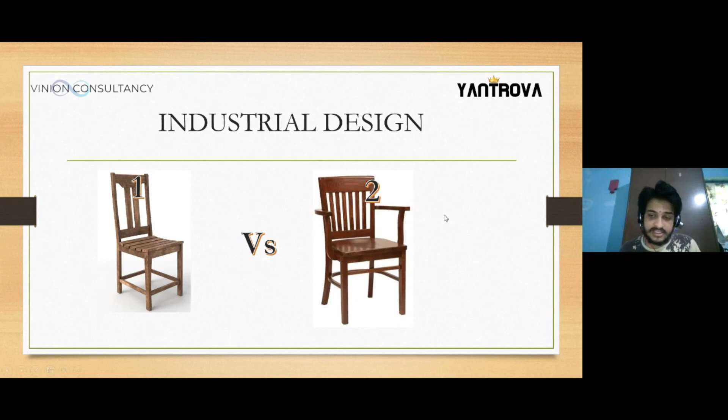Let's come to this chair part. When we compare the first one and the second one, in the first one we don't have facilities in terms of handrest, and design-wise, look-wise, it is not so good. So all these are important when we are designing. Since this normal first chair does not have those things, and when we come to the second and third chair, the second chair has a handrest and all those things, but the third doesn't have it, but the stylish look and comfortability will make the preference.

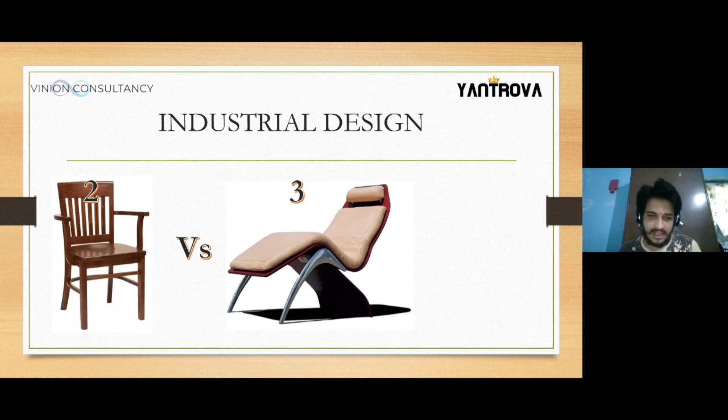Again, the preferences may change, the preference can be the second one or the third one. So again, we will go to the next one. When we see this design, kindly tell me which phone design you prefer, the first one or the second one?

First one or the second one? It's not the third one. Are we talking about the first one or the second one? The second one.

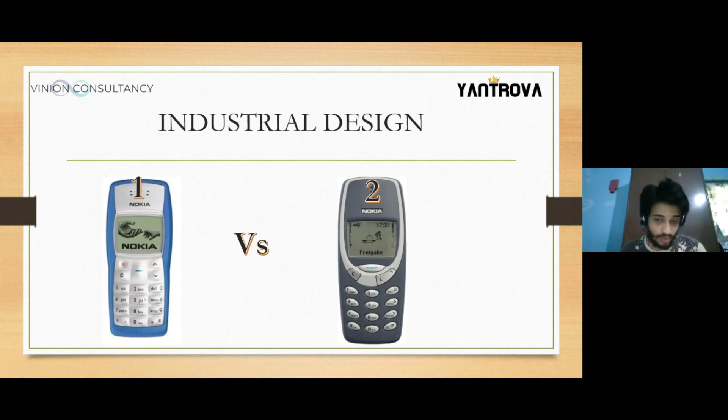So we all prefer the appearance one. We did not check the technology or anything. We prefer the second one because of the design, the appealing design. So even though it was old, the appealing design was good, so we prefer the second one.

So the major task, most major task, is to make the model or your product appearance-wise good. Even though it is functioning very well, more than the functioning, the appearance plays an important role.

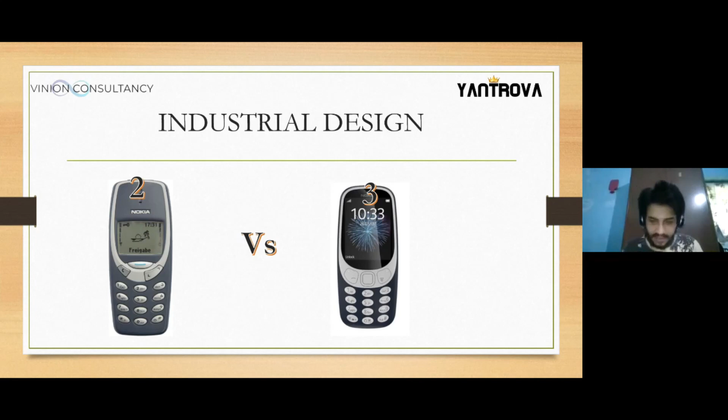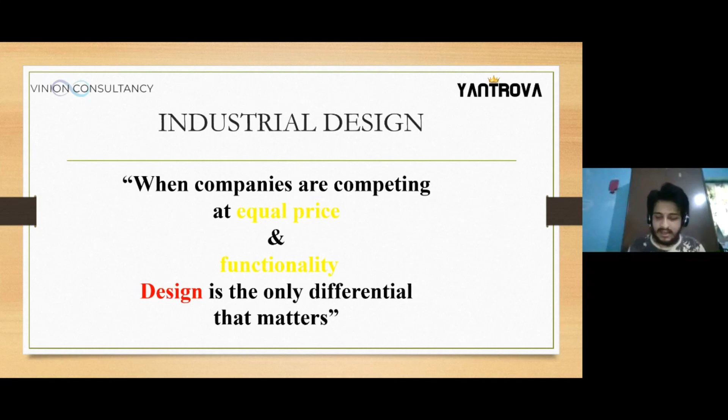So now we'll be defining industrial design. When companies are competing at equal price and functionality, design is the only differential that matters. So when there are equal price and equal functionality, for example, if you are planning to buy a phone and comparing between two phones with the same specifications and almost matching price, then you go for the design part, the looks, how the UI is there, how the OS or Android working is there. In that way you compare. So it goes to the design part, how appearance-wise it looks good, all this makes it important. So design is the only differential that matters.

So, what is design engineering? Engineering design or industrial design? It is a synthesis of technology and human needs into a manufacturable product. So what we are doing is taking technology and human needs, not only concentrating on technology but also on human needs. So this is also important. So when we are designing something, we have to take care of what the human need is, what is required, and then combine or integrate it with the technology and manufacture the parts.

Okay, so in industrial design, we have the business point of view. So we have to make our product appealing to the customer. This is the first point.

Suppose you go to a mall and start observing. Some of the most attractive things are the shampoo bottles. You would have seen different shapes of shampoo bottles. If you try to see that product and pick it up, there's a 60 to 70% chance that you will buy that product even though you may not need it, because the appearance is good.

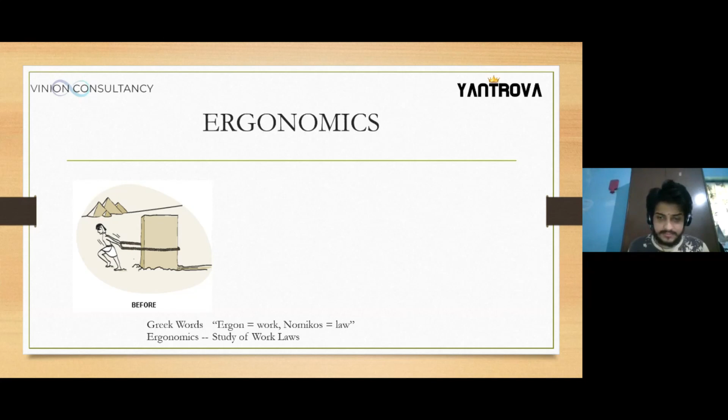Fine, so you can see here. The best way of making my work easier is using logs instead of wheels. Wheels would be a difficult one for me, but using logs will be an easy task in any situation.

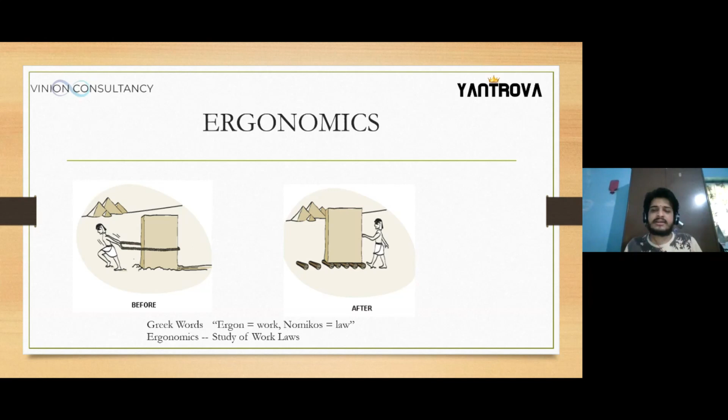So what is ergonomics? Ergonomics is nothing but making our work easy. So what we have to do is design in such a way that our work is made easier. That's it. It is the science of fitting workplace conditions and job demands to the capabilities of workers. So what is happening here?

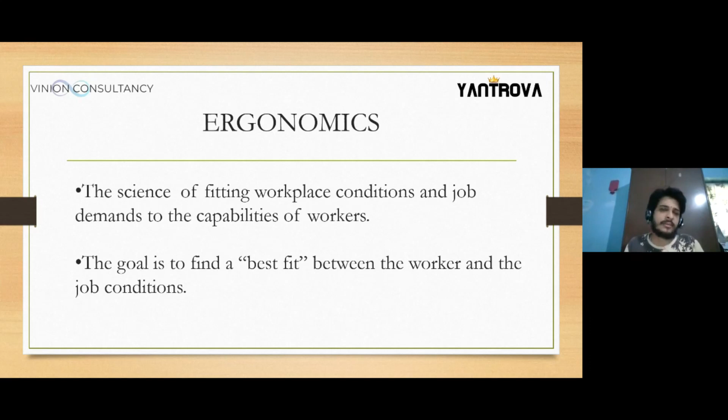So we are fitting the places, making some arrangements in the design. Basically, ergonomics is a design point of view, designing in such a way that it makes our work easier. The goal is to find the best fit between the worker and the job condition. Ergonomics helps to do the work easily in any work condition, provided we give a provision in the design, so that once it's manufactured, the operator or worker will find it easy to operate, making the work easier. If the worker understands the machine and uses it properly, and it's handy for him to move, the work will be done properly. That is the main importance of this.

Then there are some disorders as well related to ergonomics - not drawbacks, but disorders that happen and how ergonomics helps overcome that. For example, we have cumulative trauma disorder, which is a health disorder arising from repeated biomechanical stresses on the hand, wrist, elbow, shoulder, neck, and back.

For example, you would have seen many people who sit in front of the computer. They have to sit continuously for 8 hours and they find these problems. Also, they have musculoskeletal disorder, affecting the soft tissue of the body like the neck, back, shoulder, elbow, hand, wrist, and finger, including nerves, tendons, cartilage, ligament, and muscles. So all these are affected.

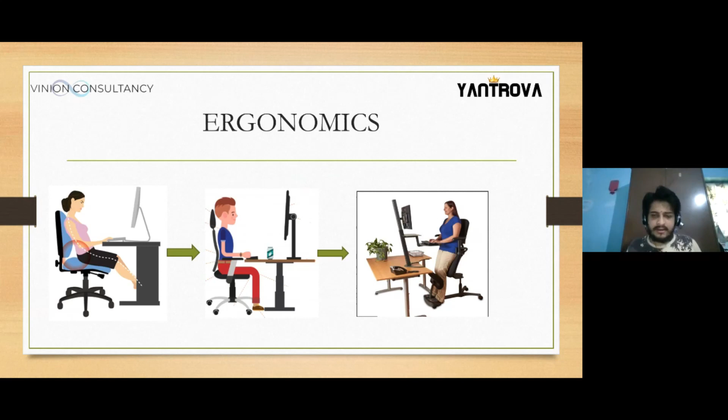So this was a small introduction about ergonomics, where design changes make human work easier and reduce stress as well as effort.

Now we will go on to the next topic, called aesthetics. In aesthetics, we'll be discussing more about the design appearance point of view. Here we were not concerned about appearance - ergonomics is about making the work easier, designing so that the operator, person, client, or customer who uses your design can use it effortlessly. There we did not think about appearance - now we'll be discussing about the appearance.

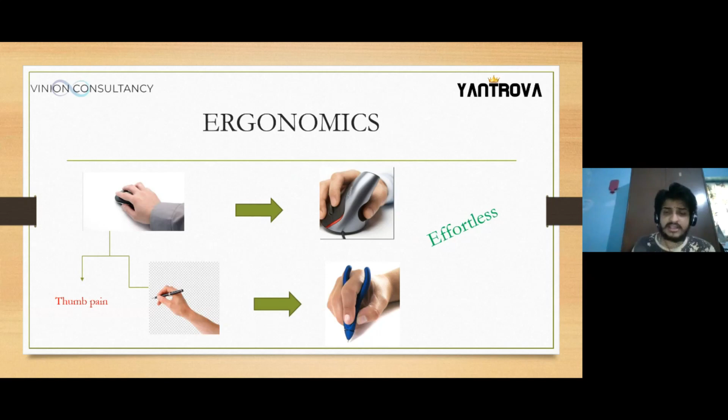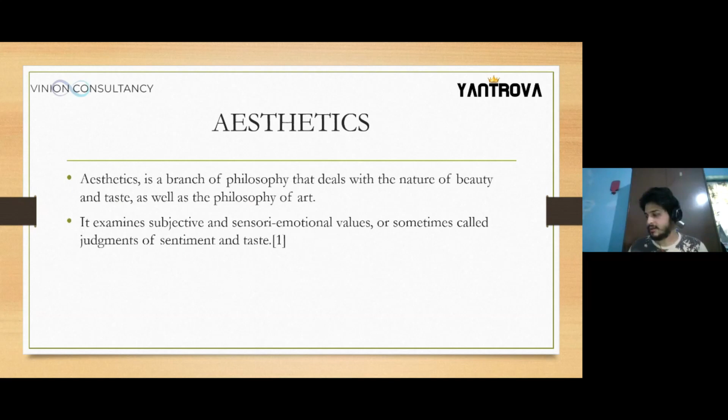What is happening here? We are mostly dealing with the beauty and the taste. Aesthetics deals with the nature of beauty, so we are mostly focusing on the appearance, the outer appearance. That also plays an important role.

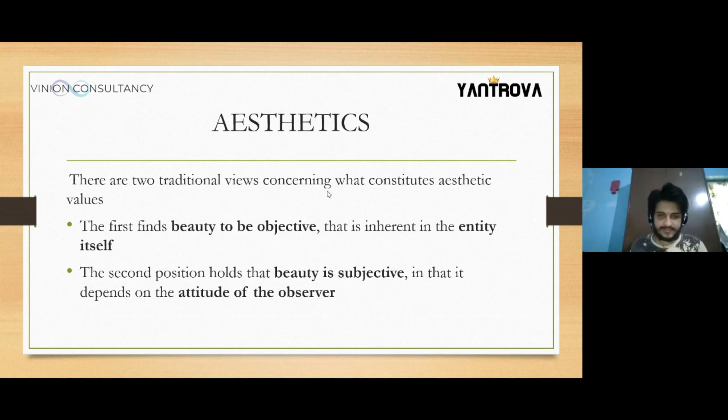So when you're into the design parts, I find people like to think about it and design in such a way that you should add all these parameters. So then once we are clear with the industrial design, about ergonomics and aesthetics, we'll go to another important topic where basic designing plays an important role.

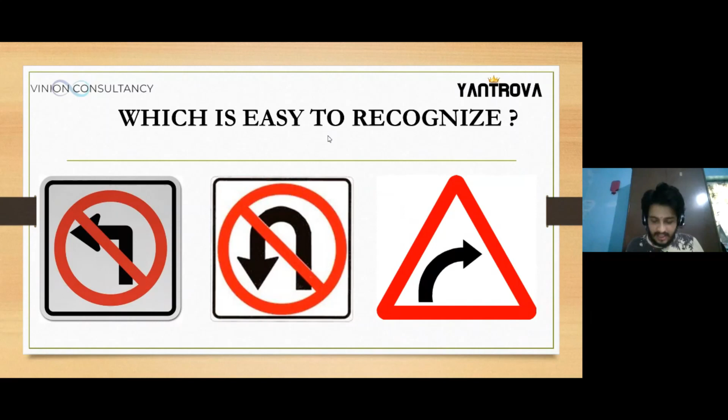The symbol plays an important role because reading a signal will take a lot of time, at least 10 seconds for us to recognize and think. But when we see the symbol, it will directly come into our mind what rule we have to follow, and what rule is represented on the board. So it is very easy to recognize. That's why we do the same here.

So we are talking about GD&T. That's why in GD&T we use symbols, to make you understand how GD&T works. So what is GD&T? It is nothing but Geometric Dimensioning and Tolerancing. It is a system of symbols, rules, and definitions used to define the geometry of mechanical parts.

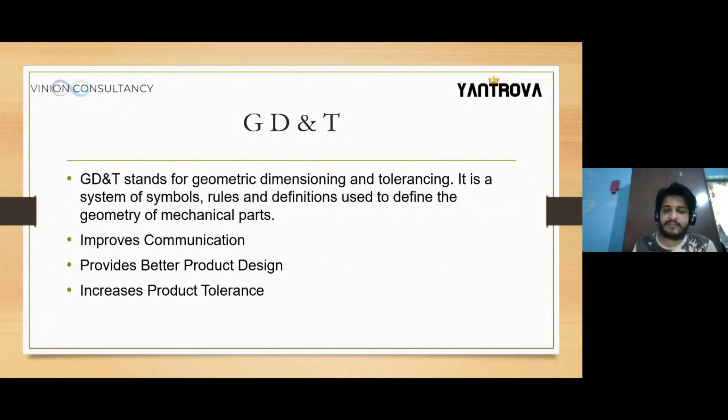It improves communication. If you want to communicate with anyone, like if you are a designer and want to communicate with your operator, the best mode of communication is GD&T. With the symbols you can educate him on what symbols have to be used and how it has to be done. It also provides better product design. When you give proper dimensioning and tolerancing, the design will be very good, and it increases the product tolerance.

Now we'll study GD&T by understanding it through a story. I'll be narrating a story, and based on this story we'll understand how GD&T works. Let's start the story.

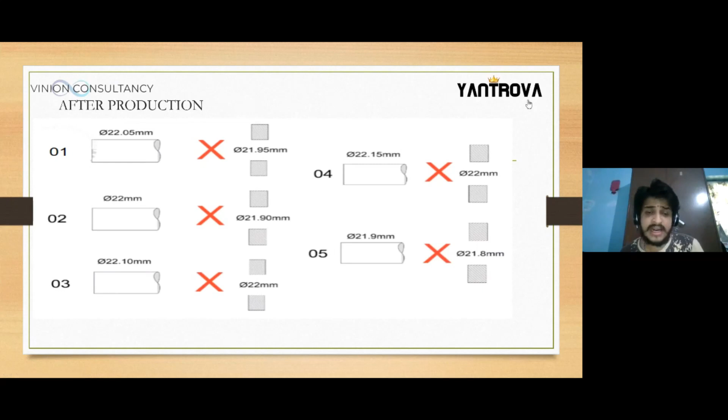Now this is a big problem for the designer. What happens? He'll ask the operator, and the operator tells him, see, you have given me dimensions, but I'll not be able to manufacture it properly because there are some limitations. For the shaft I can make plus or minus 0.25 mm, and for the hole I can make plus or minus 0.2 mm. So these are the limitations, this is what I can do.

So this is the first lesson where the designer learns that he can't design everything on his own, or give dimensions on his own. He has to check the capabilities of the operator as well as the machine. So the operator says, you have not asked me, so I will not tell you.

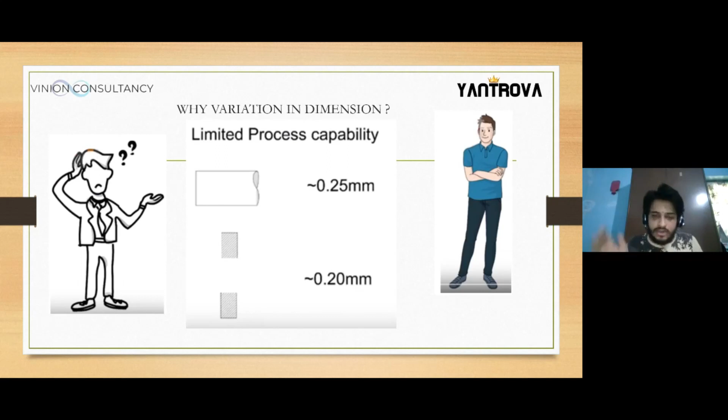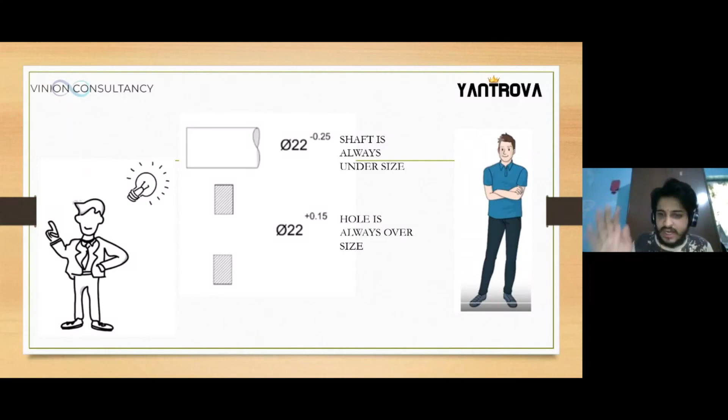So now the designer thinks about it and comes up with a plan. He calls the operator and tells him, see, whenever you are producing a shaft, since your capability is plus or minus 0.25, you always make the shaft undersize, and always make the hole oversize. This is the condition he explains to the operator: make the shaft always lesser in size, and make the hole always more in size.

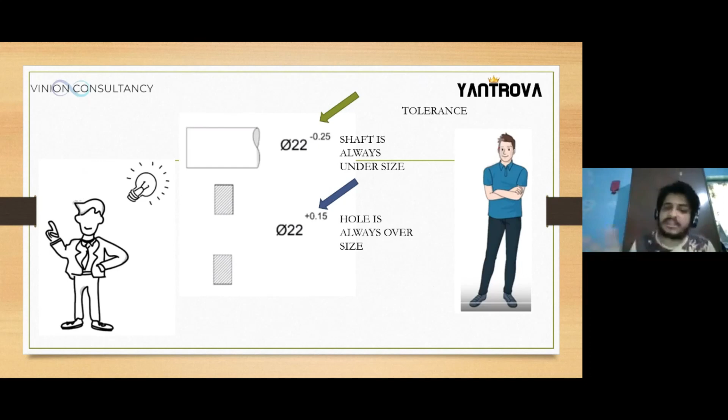In that way, he feels that since the shaft will always be lesser and the hole will always be larger, the assembly will be possible. This is nothing but the tolerance which he has given. So now he gives the tolerance—earlier he had not mentioned it. Now the operator takes it and starts with the production part.

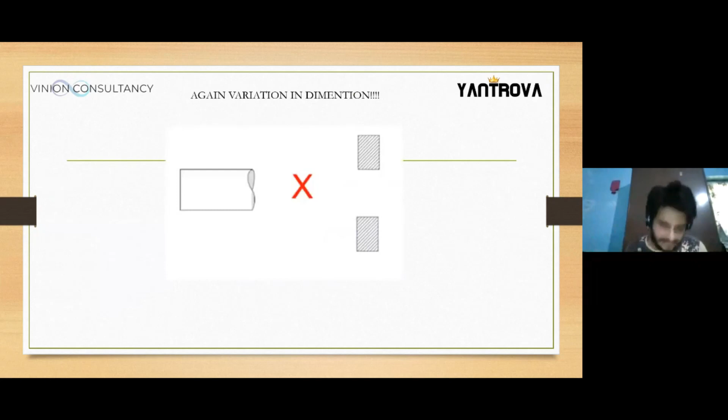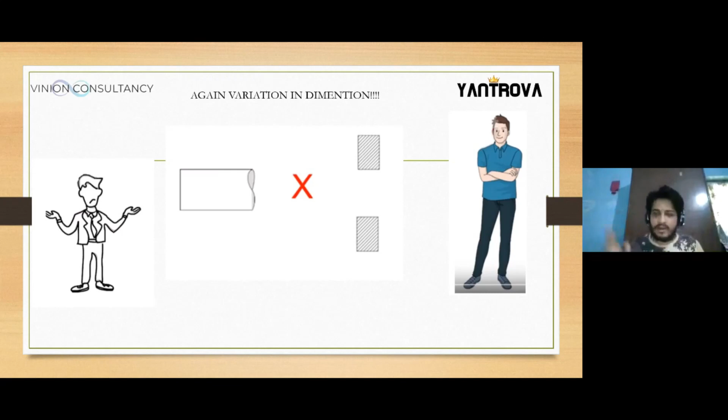Again the variation in dimension takes place. Now the designer goes mad and calls the operator: I have given you the dimension, I told you to make the shaft lesser and the hole size bigger, now assembly should be possible, what is the problem? Now the designer tells the operator to measure it.

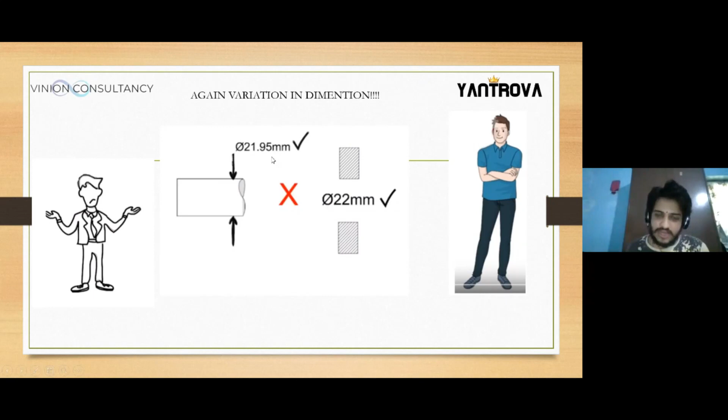So the operator measures it. The size, if you observe, is 21.95, and the hole size is large while the shaft size is less. Now the assembly should happen, but why is it not happening? Then he checks it again and observes that on one side it is 21.95, but on the other side it is 22.2. That's why the assembly is not happening.

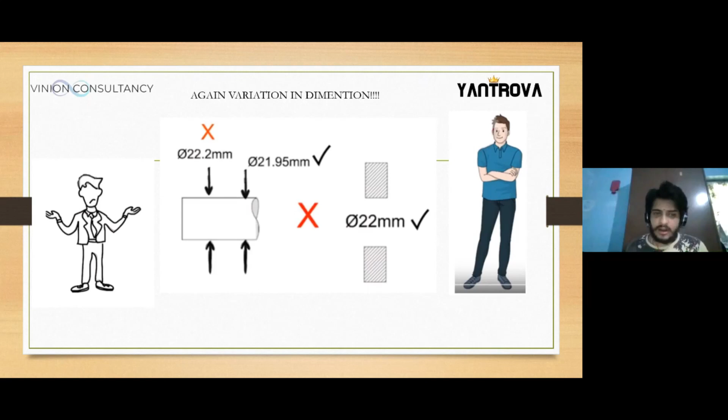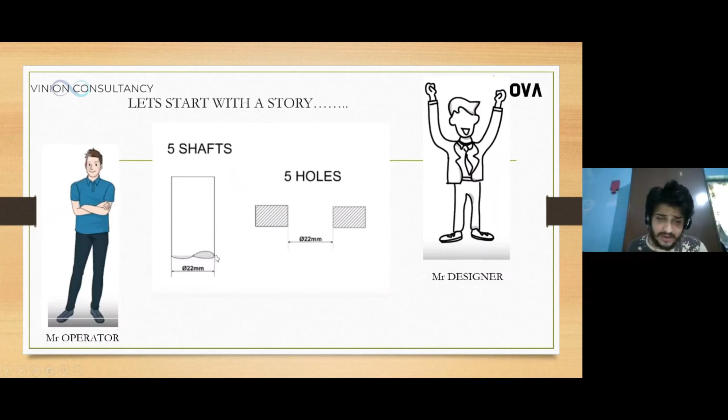Now he asks the operator, what is the problem, why have you done that? The operator explains that when you gave the dimension, you had mentioned it only for this part, so only this part was considered. That's why I maintained the size only from here to here—I did not care about the other side. So it depends on whatever dimension is given; the operator just follows it.

So now, majorly, the designer is in trouble. He needs to do some brainstorming, so he goes to brainstorm and comes up with three questions.

Should I write it on the drawing? If he starts writing on the drawing, then instead of sketches, it fills up with more writing and becomes confusing. So that's wrong, he can't use that.

Then, should I tell the operator verbally? If you tell the operator verbally to do this, again it will be a problem, because every time the operator shift changes, communication problems may take place, like language issues. He may misunderstand what is being explained, so verbally it will not be possible.

Then, should I design some common set of symbols? He got this idea from traffic symbols, something like that. He realized symbols are easy to understand because they can be understood by uneducated people too, so it would be very simple to explain.

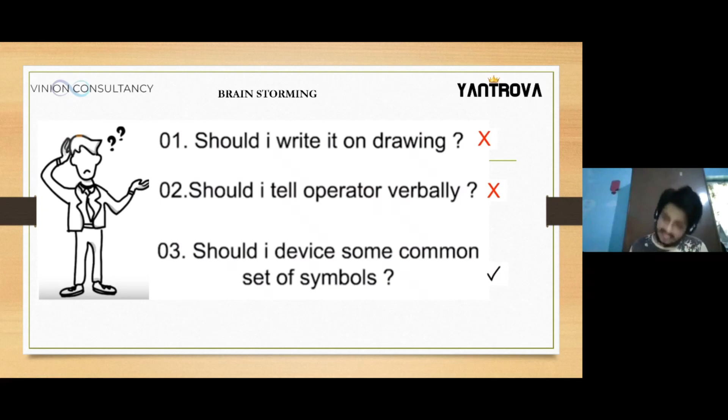So he decides to devise a common set of symbols. He comes up with a design and calls it the design symbol. He calls the operator and tells him, I am following a symbol called cylindricity—this is the symbol of cylindricity. With this symbol, a tolerance of 0.15 should be maintained throughout, not just at one point, it should be followed throughout.

With this symbol, the operator also understood whenever he finds the symbol, and he thought he explained him properly. So in this way, the evolution of the GD&T symbols came in.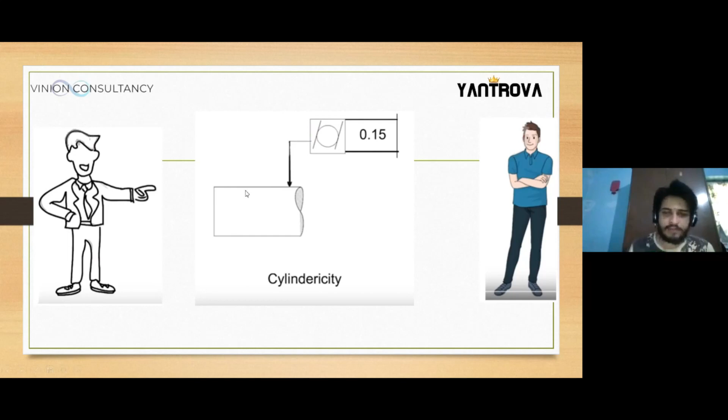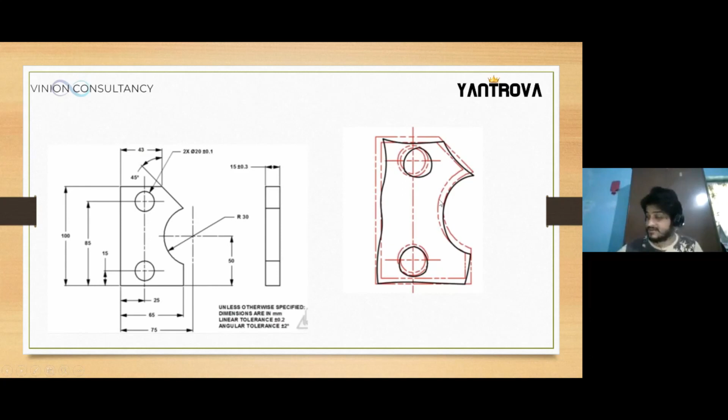What is the problem? The manufactured part is the second one, according to the design itself. The problem is it is not straight here, straightness is not there. So the perpendicularity, parallelity, this side parallelity, the circle is not in the proper position. Even though it is round, it is also not round. It's not in the proper position. Even though it is following the dimension, the appearance, look-wise, it is not proper. So these are the problems which you find.

But once we use these types of GD&T symbols and start with it, you can see that the models you are getting are good. Okay, now we'll go to the next one where we are discussing the symbols.

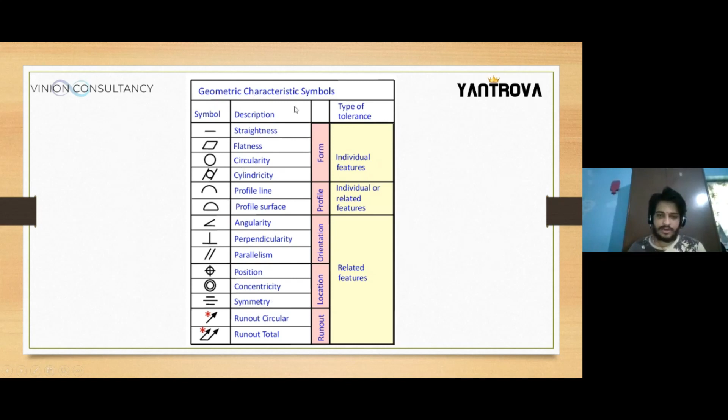Here there are a number of symbols, we'll go individually. So this is an attempt. What we are trying to do is compare GD&T with normal day-to-day usage of different things, so that we can correlate GD&T and understand it easily.

So for example, in the form type, we have straightness. You can see that a person is walking straight on the street, this is called straightness. Flatness, the vessel and the vessel - if the base is flat, then only you will be able to place it properly. Then circularity is the giant wheel part. Cylindricity is inserting a pipe inside a pipe.

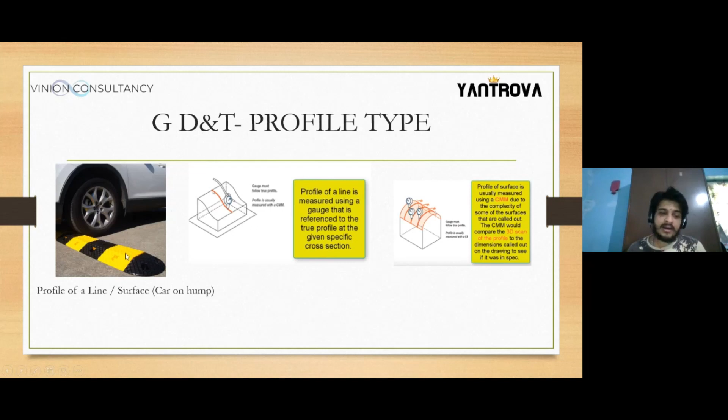Then we have profile type, a car on the hump. And then we have orientation type where we are talking about parallelism, where the chair is parallel to the ground, and then we have perpendicularity, the fan wings perpendicular to the roof, and angularity, the tap to the water flow.

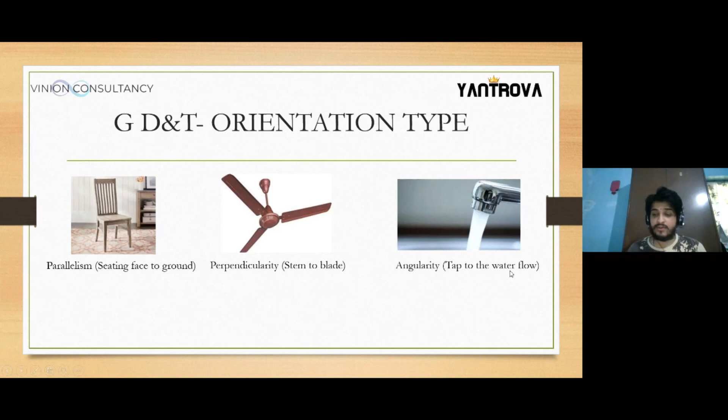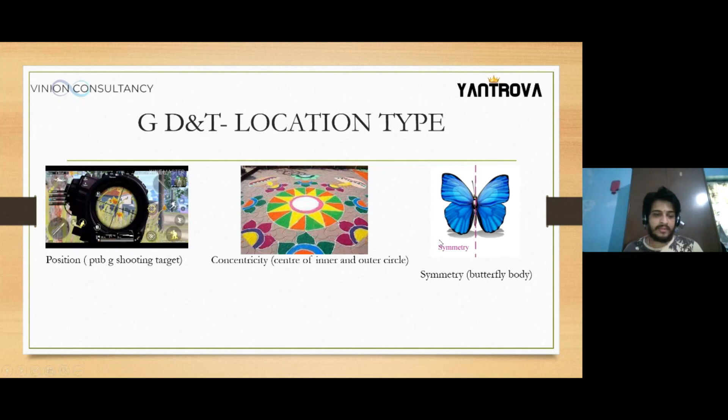Then we have position, that is like a PUBG target, this is very known to you. Then concentricity, the Rangoli type here. And then we have symmetry, like butterfly body. And then we have run out, like with reference to one datum, we have taken the run out.

This is related to tolerance, limits, and fits. In the tolerance part, it is the allowance which we are giving, which we are providing, so that we don't need to break our minds manufacturing in exact size. Exact size manufacturing is not possible, so we give some allowance or tolerance. Limits - there is a maximum and minimum limit.

And then comes the fit. There are three types of fits - most things you will be known to this. There are three types of fits: the interference fit, the transition fit, and the clearance fit.

Then we have material conditions - maximum material condition and minimum material condition.

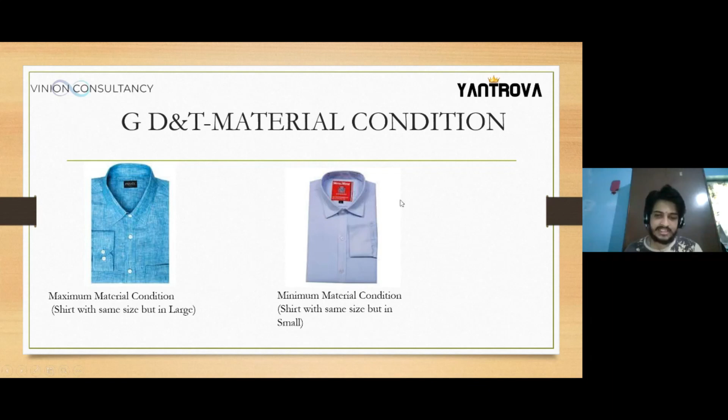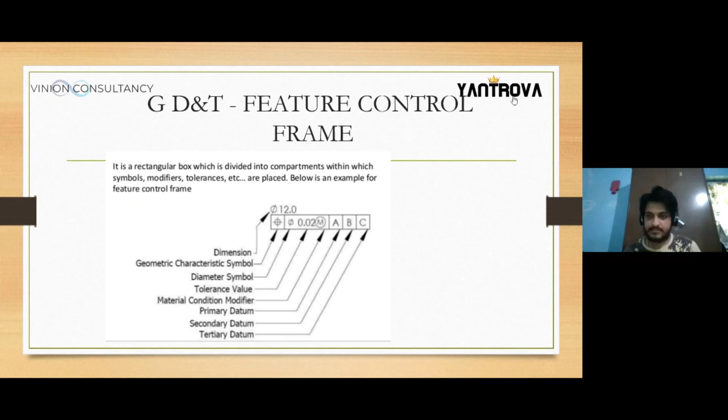Now next we will be jumping to the next important topic, called jigs and fixtures. Jigs and fixtures are like supporting devices which help us do our mass production easily. Jigs help mostly in drilling holes, and fixtures help in milling and turning, not drilling.

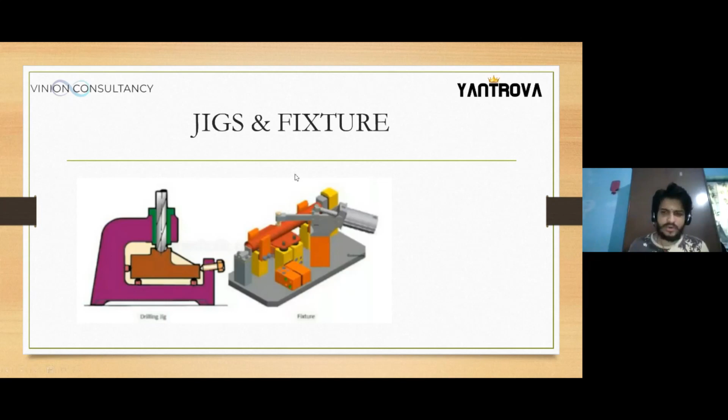So what is jigs and fixtures? This is mostly for the mass production part. What is a jig? A jig is a work holding device. What does a jig do? It will hold, support, and locate the workpiece. This is what jigs do.

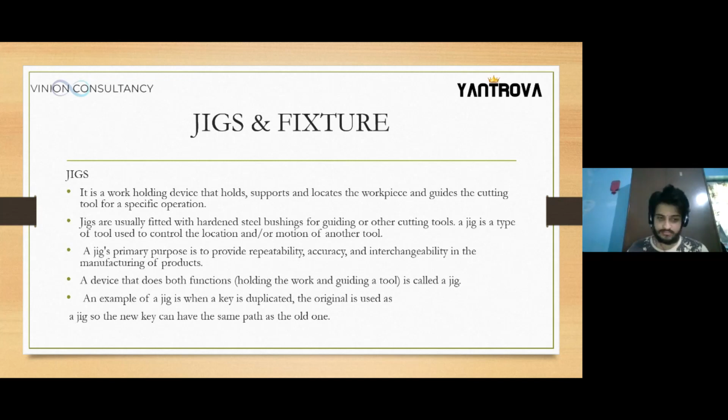And what about the fixture? Just a minute, guys. Okay, let's continue. A fixture is a work holding device that holds, supports, and locates.

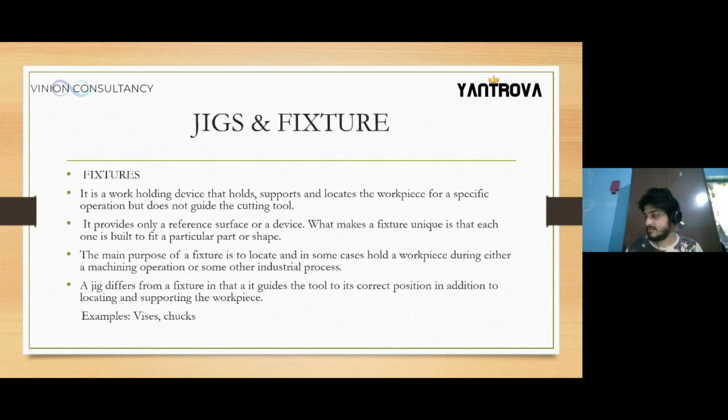The difference between jigs and fixtures is: a jig will hold the workpiece, support the workpiece, and guide the tool. But in a fixture, it will hold and support the workpiece, but it will not guide the cutting tool. So the difference is, it locates and holds the workpiece and guides the cutting tool. Here, only holding and locating is there in fixture.

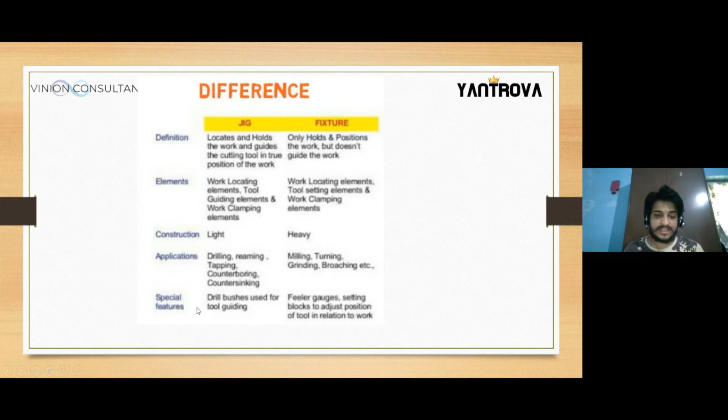Then the elements are like work locating elements, tool guiding elements, and work clamping elements. Here we have tool setting elements. The jigs are lighter and the fixtures are heavier. Application-wise, jigs are mostly for drilling operations, while fixtures are for milling and other operations. As special features, we use drill bushes for jigs, and feeler gauges for fixtures.

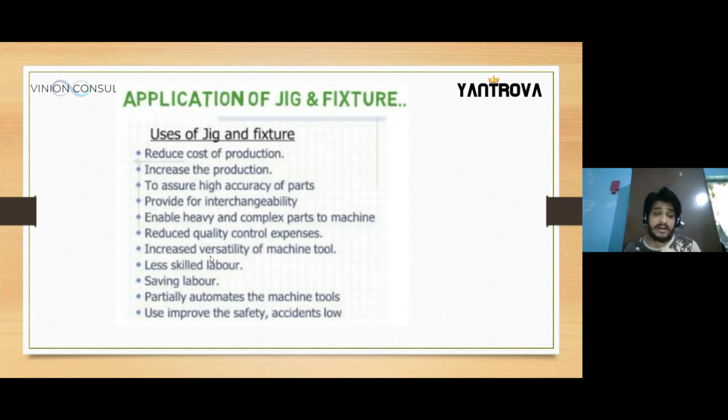So what is the use from the application point of view? It helps reduce the cost of production. If jigs and fixtures are used, any labor, even unskilled or uneducated labor, can do the manufacturing work, because we give them like a template. Jigs and fixtures can be called a template. So the worker will just follow the template. That's it. It gives high accuracy, interchangeability is there, it saves labor, and less skilled labor is also welcome.

Then what are the fundamental principles of jig and fixture design? It includes locating point, foolproofing, reduction of idle time, weight of the jigs and fixtures, jigs provided with feet, materials for the jigs and fixtures, and the clamping devices.

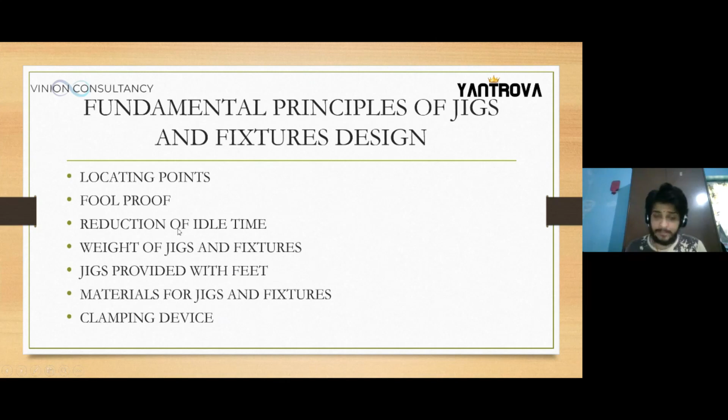Now I'll be ending this session with some topics. Lastly, I just want you guys to revise. We discussed the design point of view, where we spoke about ergonomics, how aesthetics plays an important role, then symbols where GD&T is used, and from using GD&T we also discussed how jigs and fixtures work, which helps from the manufacturing point of view. So the jig and fixture designs are also good. Here I tried to explain this in a very limited and simple way, and I hope you have understood the information I have given.

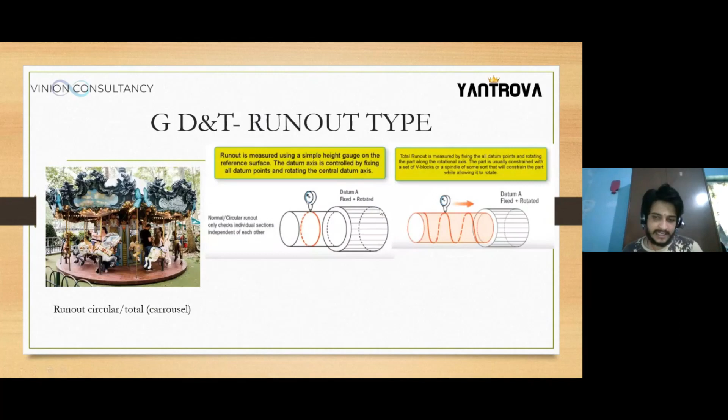The same concept applies to cylindricity. Runout is dependent - it depends on the datum, it is not independent. But with cylindricity, it is not dependent on the datum. This is the major difference here.

Primary and secondary datum are for reference, to lock it in. We take references so that dimensions are measured with respect to them. For example, if you want perpendicularity, there should be two quantities. If you want parallelity, it should have two sides - you can't have just one side parallel. So two sides need to be compared. In that way, we have primary, secondary, and tertiary datums.

What is the difference between drawing and symbol? A symbol is also part of a drawing. Drawing is presenting your imagination of the product on paper - that's what we call drawing. The symbol is for defining that drawing. Once you've drawn it, you need measurements - how it works, what measurements are involved, everything is important there. So in that case we use symbols. Symbols play an important role. I think I've answered you, Rishabh, as well as Chaitanya.

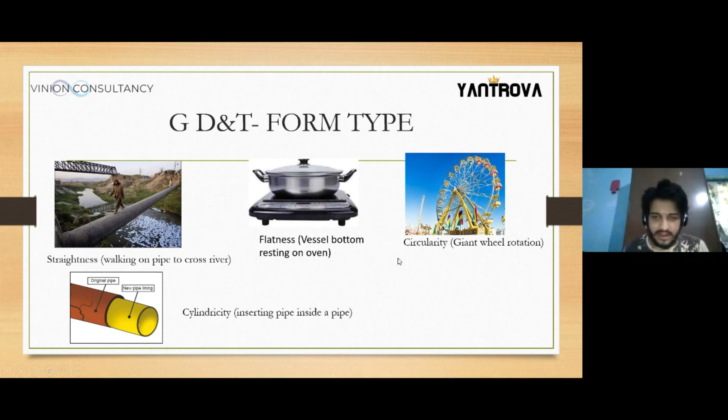So this is Sumant. I am a CAD designing coach. I have experience of more than 5 years training students as well as professionals in mechanical softwares, and I have also associated with startups as well as government projects. These are the projects which we do, and we can help you with that.

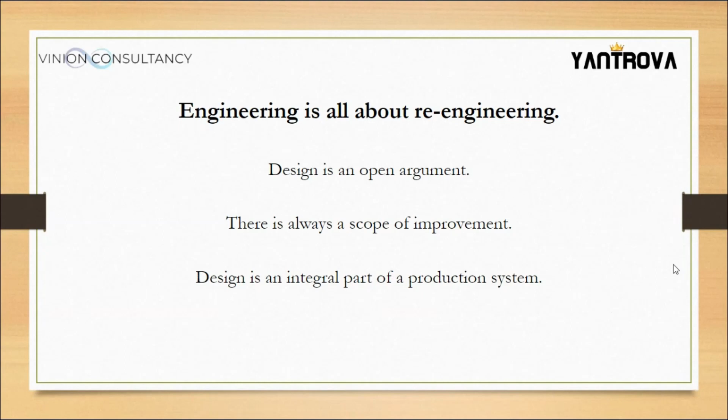That is what makes designing an interesting field. Because design is an open argument, there is always scope for improvement. Design is an integral part of a production system. Design, production, and manufacturing are not individual concepts - they all fall under the big umbrella of engineering. Design is an integral part of production, and design is the greatest influence towards the cost of the product.

When I'm talking about the cost of the product, I'm also talking about the production cost of the product, because the better design you have, the lesser is going to be the cost of production of the manufacturing.

Now here when we talk about designing in this part of the session, we are talking about product design, not the industrial design. So when I'm talking here about design, it can be a software design, it can be design of an automobile product, it can be design of a PCB or anything.

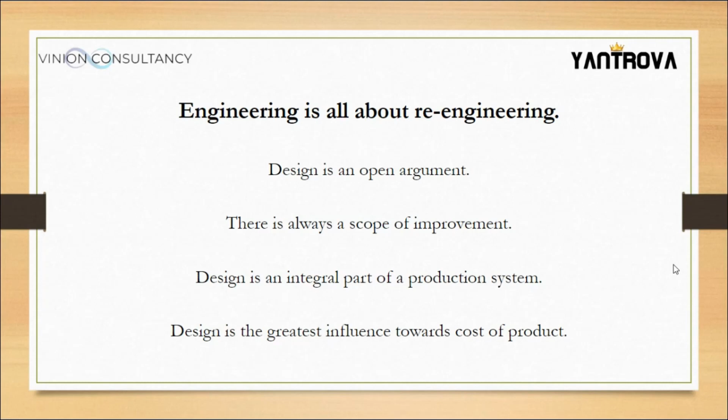So design is always an open argument. There is always scope for improvement. Design is an integral part of the production system, and design is the greatest influence towards the cost of the product. Now, how is quality integrated with design, and why is the integration of quality important?

First, it reduces the product cost. Second, it reduces the lead time. What is the lead time? Lead time is the time between the conception of a product to its entry in the market. If the quality is integrated, if the process optimization is integrated, the lead time is automatically reduced.

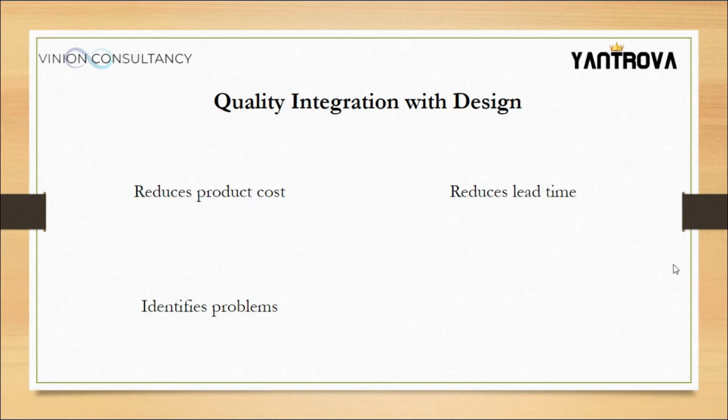Then quality also helps us to identify the problem. People usually associate quality with something to make it good, but for you to make something good, you need to understand the problem. Problem identification is one of the biggest challenges for the designers. So with the integration of quality, we are able to identify the problems, and also it helps us to shortlist the solutions. Shortlisting of the solution is very, very important.

Now, for the last 3 or 4 sessions that we have taken on different aspects of the industry, we have always focused on the 3 pillars of business. Every single business, every single product is built on these 3 pillars. The first pillar is cost. With the integration of quality, we are able to reduce the cost, reduce the lead time, and the third and the most important is flexibility. Because we are able to identify the problems, we are able to shortlist the solutions based on the identified problems.

We are able to bring flexibility towards the whole production system. We are able to bring flexibility towards the whole environment. So with the integration of quality, we are able to solve the problem of the 3 pillars of business - cost, time, and flexibility.

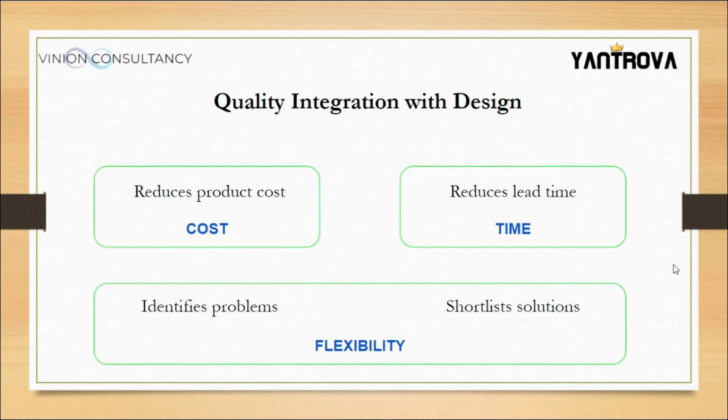Towards one - so talking about quality integration and problem solving, we come to a technique which helps us to identify the problem, and this technique is called DFMEA. Now, what does DFMEA stand for? It is Design, Failure, Mode, Effect, Analysis.

It is Design, Failure, Mode, Effect, Analysis. What does it do? What is DFMEA? It identifies the potential failure. It does not identify the failure in the problem, in the situation - it is not identifying the problem. It helps you to identify the potential failure. What is the potential failure? It is the anticipation, the identification of a failure before it happens.

Like when you are designing a product, you are supposed to have the understanding, you are supposed to have a visualization power of how the product would be manufactured. Based on that, you would be able to identify the points where this product is going to fail. If you are able to anticipate that, then you are identifying the potential failure points. And based on that...

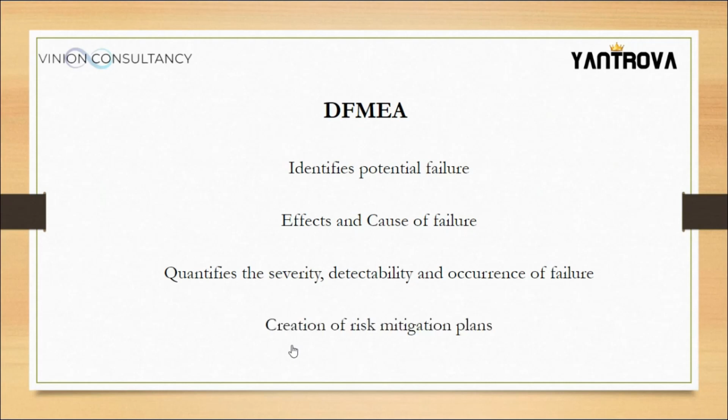What you would be able to do is, you would be able to understand the effects and causes of this failure. Once you identify the effects and causes of the failure, using DFMEA - Design, Failure Mode, and Effect Analysis - you would be able to quantify the severity, the detectability, and the occurrence of this failure. Now, why is this important? Because once you identify all the potential failures, you would be able to create a risk mitigation plan.

You would be able to create an action plan so that you avoid future failure beforehand. Instead of designing a product, testing it, waiting for it to fail, and then correcting it, you are able to identify the potential failure beforehand. You analyze the effects and causes of the failure, quantify the severity, identify how often you'd be able to detect the failure, how often it would occur, and create an action plan without actually making a product. So before the product is created, you have already identified all the problems beforehand. When you have the final product design, it is already foolproof to enter the market. This is the biggest advantage of using this technique, design failure mode effect analysis, DFMEA.

Now, if you observe, DFMEA is kind of like a film critic before a movie. Usually, before a movie releases, let's take Shah Rukh Khan for example. Before his movie is released, people compare it to his previous movies and say the previous three were bad or good, so they expect the next one to be good or bad. For example, if Shah Rukh Khan was horrible in one movie as a villain, it would be presumed that in the next movie he'd be bad as a villain again, and he should not repeat that. Nobody talks about what he should do to improve; people talk about what he should not do to be bad again. So DFMEA is like a film critic before a movie.

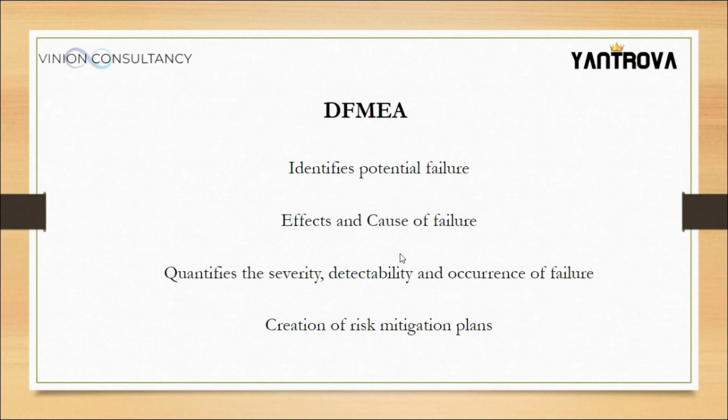This is all it is. So now, what are the main terminologies for DFMEA?

The first is failure mode. What is a failure mode? It is how you are going to identify a failure, what is the symptom of the failure. It is not the problem, it is not what the failure is. It is how you are going to observe the failure, or how your customer is going to observe it. Failure mode is not the failure itself; it is how the other person or your team is going to identify the failure.

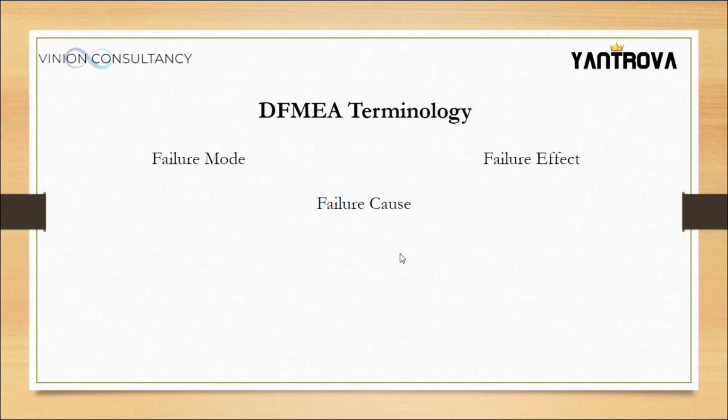The second is the failure effect. What is going to be the effect of the failure? The third is the failure cause. What was the cause that led to this failure?

Then there's the severity rating, usually a rating between 1 to 10. We'll discuss on what basis this scale is decided, but it's a rating from 1 to 10 in which the severity or impact of a failure is calculated. Then comes the occurrence rating, again a scale of 1 to 10, which identifies how frequently this failure is going to happen. Third comes the detection rating, how easily or how difficult it would be to detect the failure. These are what these three terminologies mean.

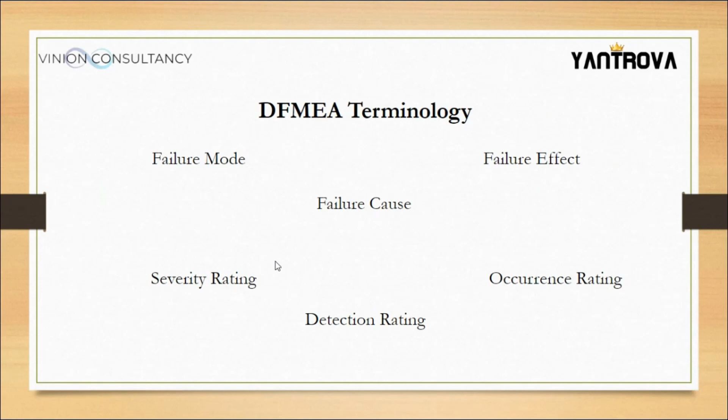Now let us see how this is implemented. The failure mode, failure effect, and failure cause are used for problem identification. These three are grouped in a way that we are able to identify the problem which needs to be solved for the launch of the product. This is what we use for identification of the problem.

And then severity, occurrence, and detection are used to identify a key process indicator, a value called RPN, risk priority number. What risk priority number is: for example, you are identifying 10 problems. As I told you, identification of the problem you have to solve is the biggest issue, the biggest complication for an engineer.

So what is risk priority number? Risk priority number helps you to shortlist which problem will have the biggest impact for a customer. It can be technically, it can be aesthetically, it can be any other reason. Now how do you understand which one is it? It would be through severity rating, occurrence rating, and detection rating. With the help of these three ratings, you create a risk priority number, which helps us understand which problem will have the biggest impact.

Now, having said that, we are not facing the problem till now. If today I am designing a product, I'm not identifying the problem which is happening for me today. I'm identifying the problem which may happen after two or three months. Now how am I doing that? I'm doing this on the basis of my previous experience with this product.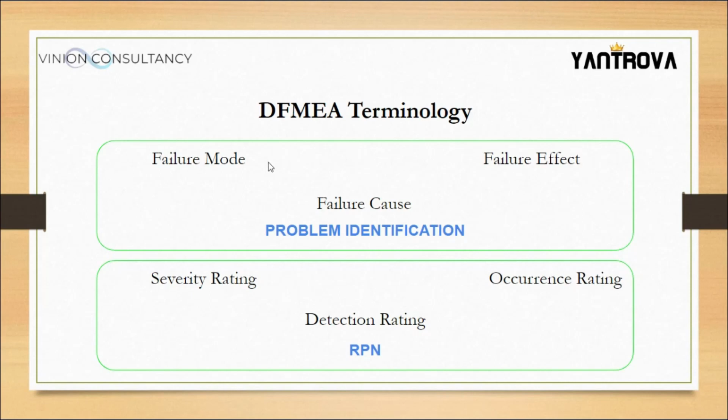Now, how is this DFMEA implemented? DFMEA implementation works in the following steps. First is the design review. The most important thing is the review of the design. So first you review the design, then you get a system overview.

What is a system overview? As I told, it's the power of visualization. You are supposed to visualize the product working in real life. For this, the understanding of manufacturing is very important. The understanding of production is very important. The understanding of customer relationship is very important.

And this is one area where designers lack. I have worked in many companies, in many countries, and I have seen this problem that designers don't have any understanding about the manufacturing. And I'm not saying this myself, the people with whom I have worked have said this thing. When I say the people with whom I have worked, I'm talking about the owners of companies, the managers, the directors. These people have said that designers have zero knowledge about how a product would be made. They only focus on designing a product, not about how to make that product. And without understanding manufacturing, you would never be a good designer.

Now it's important for you to visualize the production process. Then you would be performing the DFMEA system to identify the failure modes. Identifying the failure modes - what is failure mode? How are you going to identify a problem?

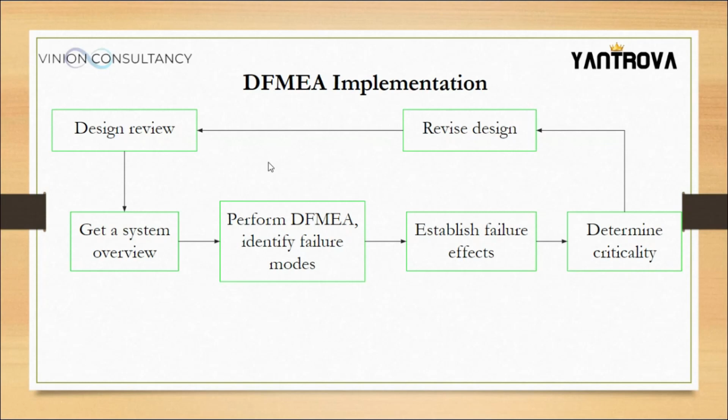Now, how is DFMEA implemented? These are the steps for the implementation of DFMEA. Now let's talk about the practical aspect of DFMEA. Let's take a look at how it is implemented in the industries. First, you are seeing on your screen - you must be seeing on your screen over here.

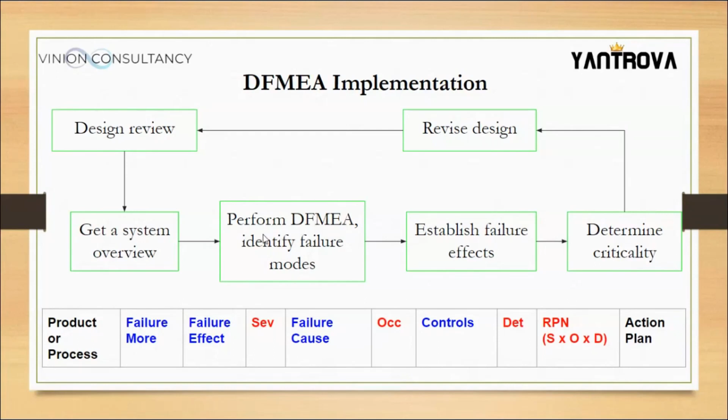Continuing, now let us take a look at an example of DFMEA with an all-terrain bicycle brake system. We will take the example of a bicycle brake system and create a table.

We have identified that the product or process is going to be our brake system. Now what is the function of the brake system? The function of the brake system is to provide the correct level of friction between brake pads and wheel rims to safely stop a bicycle at the required distance under all operating conditions.

So the bicycle is supposed to stop with the help of friction between the brake pad and the wheel rim in any situation, under all operating circumstances.

And because it is an all-terrain bicycle, it should be able to stop on the roads, on the mountains, on the ice, on Mars or Pluto or wherever it is supposed to stop. That's it - this is the function we are going to concentrate on.

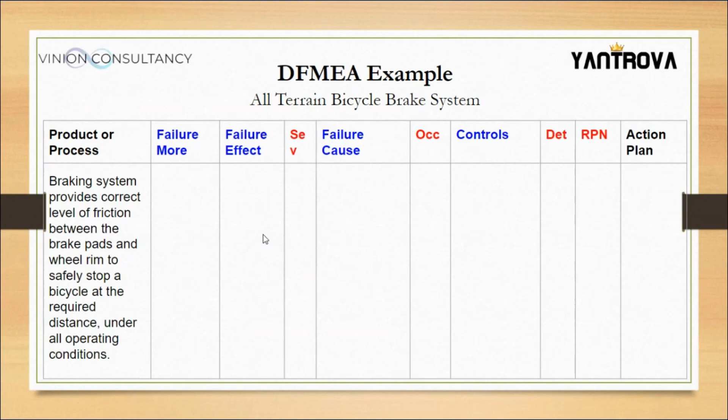Now what are the possible failure modes here? The failure mode is going to be that when I'm pushing the brake, it is not stopping in heavy rains - insufficient friction delivered during heavy rains. My bike is not stopping when it is raining a lot.

What is going to be the effect of this problem, of this mode? The bicycle doesn't slow down, resulting in an accident. This is going to be the effect of this failure mode.

Now we need to enter the severity value. How do we identify the severity? Here we have the severity scales.

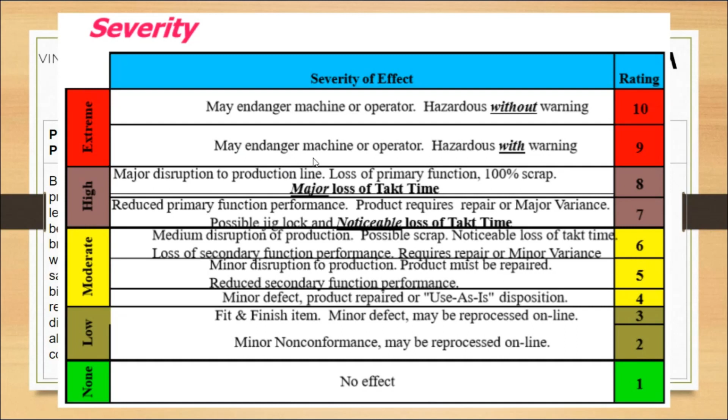It is not going to give me any warning, so it is going to endanger the operator and it is hazardous without warning. So we would give a rating of 10. But if there was some kind of system which would give us a warning, then it would be a rating of 9. So here we give the severity 10.

Now what is the failure cause? The failure cause can be that the cable is stuck due to inadequate lubrication - the lubrication was not good, because of which the cable was stuck. Then there are external foreign elements.

Those came inside the bicycle. For example, I went to the mountains for off-roading. After my off-roading, there were some amount of dust particles, some stones which went inside the cable.

So because of these foreign elements, the cable got stuck, because of which the brake was not working. The third possibility would be that the cable breaks and the cable completely broke. Okay, now we have identified three causes of the failure for the same mode.

Now all these three problems, all these three causes that we have identified, they are talking about the insufficient friction due to heavy rains. During heavy rains, this is our main mode that we are trying to solve, and we have identified three causes.

So now we need to give a scale for occurrence. How do we provide the number for the occurrence? We provide through the table of occurrence. How is it? The failure is almost inevitable. The important thing is to see here: is it going to be out of 2 parts produced, 1 part would be failing? Out of 3 parts produced, 1 part would be failing? Out of 2000 parts produced, 1 part would be failing?

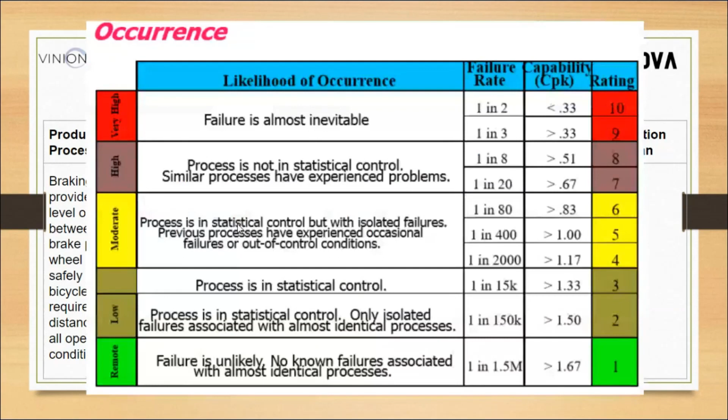External foreign elements getting stuck - this is very rare, because it is very rare, 1 in 150,000 cases, meaning 1.5 lakh cases. In 1.5 lakh cases, one case will happen in which some stone or something will enter inside our cable system and then the cable breaks. Cable breaking is also quite unoften - this is once in 15,000 cases. In 15,000 cases, one time the cable will break.

So now we are having the occurrences. We have provided the rating of the occurrences as well. Now here we are giving these values randomly, but having said that, when you work in an industry, you cannot provide any data randomly. Every single data needs to be reasoned. But here, because we are just discussing an example, I'm giving the occurrences randomly.

Now we are going to talk about the existing controls that we have for identification of these causes. If the cable is stuck due to inadequate lubrication, inadequate lubrication can be because of lack of oil, so we have an oil level indicator. It can be that the lubrication oil is there, but the lubrication is not proper because there is some kind of durability issue, so for that we have durability tests that we can do beforehand.

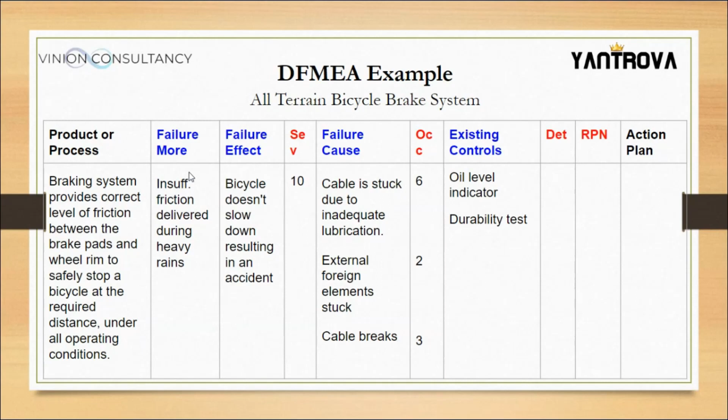And for external foreign elements getting stuck, there is no control, nobody can check. That can only be checked when you take it for servicing, but by then it is late because the accident can happen beforehand as well. And if the cable breaks, for this we have the test of durability for the cable as well.

Now we are again going to provide the detectabilities like this. We are going to provide 4 for the oil level indicator because it is comparatively easier. Durability test, we are going to give 6. For external foreign elements, we don't have any test, so we are going to give 10. For the durability test, we are going to provide 5.

Okay, based on this, we calculated the risk priority numbers. Now with risk priority numbers, we are able to identify which area we need to focus on. The first thing that we need to focus on is this one, the risk priority number with 360, because here the cable is getting stuck and the durability test.

Now this is something where we need to create an action plan. Now we have identified the problem. For this symptom, the problem exists somewhere here. So now with the help of this risk priority number, we are able to shortlist the solution.

Now the shortlisted solution is that we need to have a better durability test. If we are able to improve the durability test, then our objective would be to reduce the risk priority number. And once we reduce the risk priority number based on the plan, we would be revisiting and updating this durability test identification.

As soon as you update this, the value will fall, and automatically the value of risk priority number will also fall. When the value of risk priority number falls, the second problem would be identified. Maybe this one would be the higher value. If this goes to 200, then you need to focus on the oil level indicator. So this is how you identify the problems.

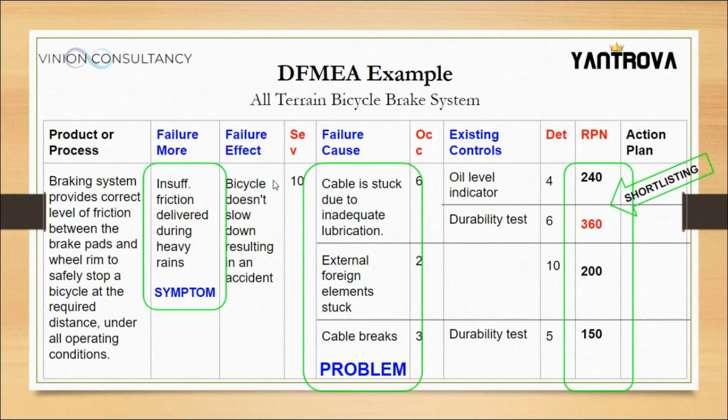For example, we identified the problems - I would like to discuss the harsh realities with you. The harsh realities are something we found in the media, and we identified these as the problems on the basis of which the Masterclass Infinity was designed.

The first harsh reality is about Aspiring Minds, a company that conducts studies. According to Aspiring Minds, they conducted an employability focus study based on 1.5 lakh engineering students, and they found out that only 7% of engineering graduates are employable.

According to the CEO of Tech Mahindra, Mr. CP Gurnani, 94% of engineering graduates are not fit for hiring. This I am not saying, these guys are saying. If you don't believe me, you can fact check it. Go to the internet and type '94% of engineering graduates are not fit for hiring,' and you would see a complete article on that.

And according to Forbes, only 52% of freshers are retained by companies after their initial contract. Every single year, around 15 lakh engineers finish their graduation in India. Out of those 15 lakh students, only around 8 lakh students are retained. The remaining 7 lakh students are fired after their 6 months contract.